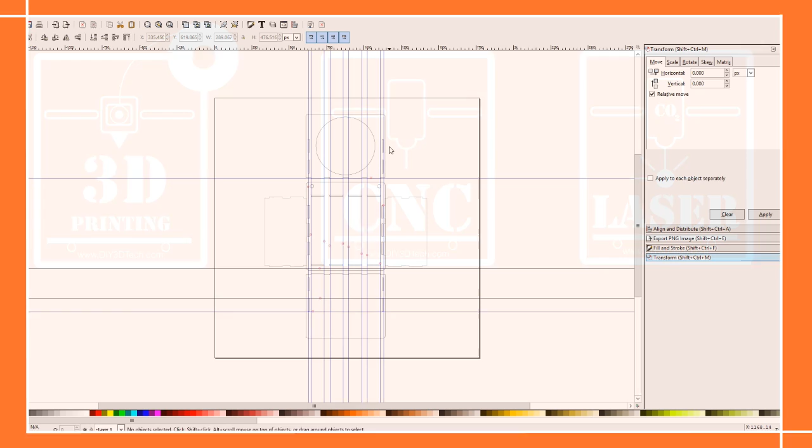In this episode, we're going to take a look at cutting this out on the laser. So what is this? This is a sanitary wipe holder that we're going to cut out of acrylic for the utility room. So the idea is we'll have a couple mounts here for the pegboard. So typical pegboard's about 1 inch on center, so we've spaced these out about 6 inches, and this is going to be a little bit proud of that.

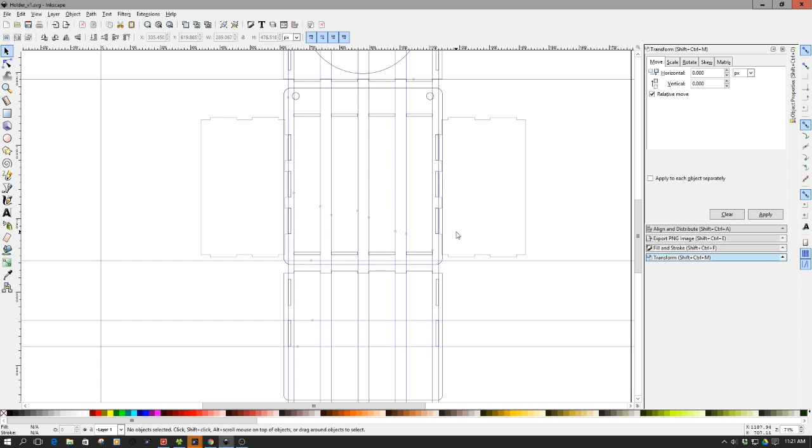And the idea is we'll have a top piece with a canister we'll slide into, and obviously a bottom piece to support it, and then flanking sides, a left and a right, to provide additional support to the bottom. The idea is we'll cut this out of about 2.4 millimeter acrylic, and then kind of glue it up with some acrylic adhesive. So just want to talk about a few basic design tips here.

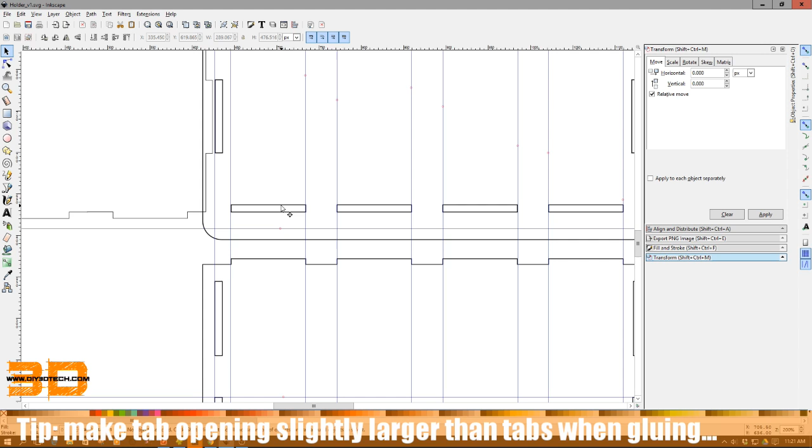So one of the big design tips is keep in mind that the laser is actually going to cut both sides of this line. So this is one of the reasons I've used a rather narrow line to minimize the kerf. Now this is both your enemy and your friend, because it is going to make the hole larger, and instead of scaling the hole, what I've done is ensure that the hole is actually just a slight bit larger than my tab that goes in it, because again, I'm going to glue this up, so I'd rather have a little bit of extra room rather than a little bit less room.

And that also goes for the sides here, because as you can see, my edges here to here are just a fraction of an inch proud, and when it cuts it out, the laser cuts the outside of the line, the kerf will create about a 0.2 millimeter kerf, so I'll gain about 0.2 on each side, to give me a little bit of wiggle room, and I kind of want that, because the intention of this design is not to be pressure fit so much as it is to fit together and be glued up with some acrylic adhesive. So that's a little bit of a tip in working with that.

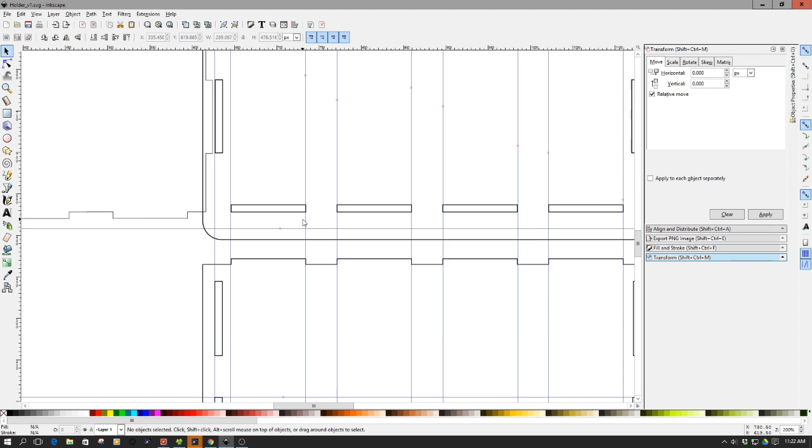Be cognizant of that. The other thing that I want to point out is when you're working with thin areas, for example, like we have up here and here, because if these get too close to the edge, when the laser is cutting the outer curve, it tends to melt this area just because it's obviously getting hot and it can't sink or dissipate that heat. So be careful how close to the edge you get.

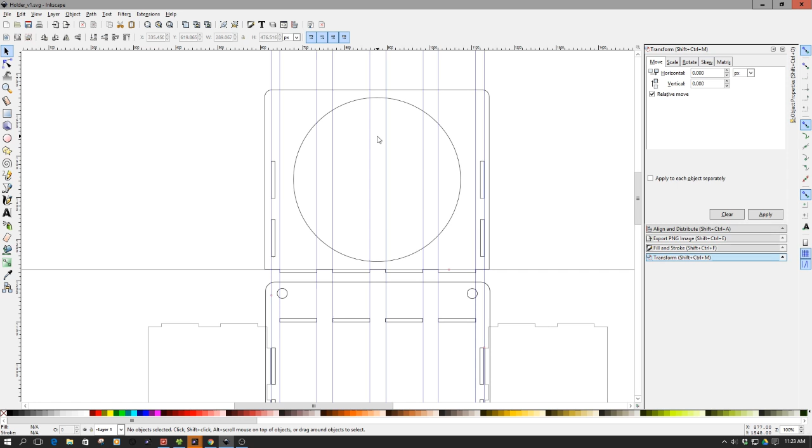Actually, I was a little bit closer. I wanted to be a little bit prouder in the size of the circle. And I got a little close to the edge in the first design, and I had to back this off a little bit to prevent it from burning through. So just kind of a little bit of another tip to help that along.

Now, the one thing I did do to speed this up is I utilized the same set of tabs both vertically and horizontally, and this allowed me to cheat a little bit, because when I added these, and even these two are simply two of these four, it connected over here by going up to path and doing a union, as you can see here, and that's what I did across the board. Now the one thing with this means it's not going to be perfectly symmetric. It is going to be asymmetric.

What does this mean? This means you'll have a left and a right, you'll have a top, and you'll have a bottom. Now, one of the things I do after I cut this out, I kind of dry fit it, and then I put a piece of masking tape on it indicating left, right, up, and down. So when I go to assemble these, it's a little bit faster, because when you're working with the adhesive, especially acrylic adhesive, it dries almost instantaneously.

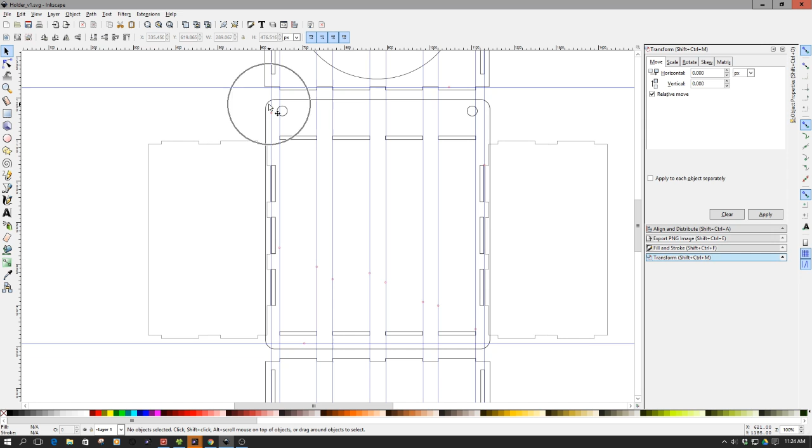So you want to make sure you got everything in the right spot before you go to do that, or you're going to waste about $10 in plastic. So kind of critical piece going through and doing that. I've used the box rounded corners function of Inkscape to provide some nice relief on the edges. I've squared them up here for rigidity, so just a couple points there. Outside of that, it's a pretty simple design.

Now, the other piece I did do is I did break these up into 5 different pieces. So top, back, bottom, and then 2 sides. It's 5 different SVGs after doing my design here, so I could cut them out, because I typically used about a 10 by 10 inch sheet of acrylic to cut these from, that I cut down from a larger 24 by 24 piece of acrylic to fit in the machine easier.

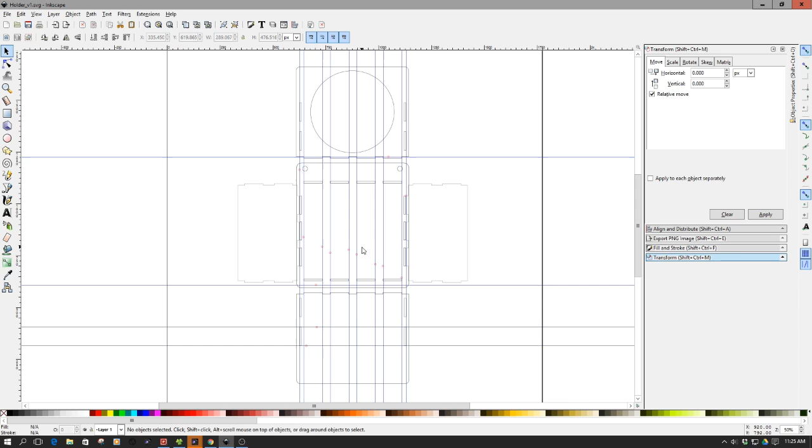So anyways, if you have like a standard 40-watt K40 machine, just kind of another tip to be able to break it up. So do your alignment in one big drawing, and then break them up, and then distribute them to smaller SVGs. And then I simply imported it into Corel Laser and then cut from there. So tell you what, let's hop over to the bench and let's take a look at the end product and see how it all works out.

Okay, welcome back. So in the computer we took a look in Inkscape at designing this, and now we've cut it out and I've got it laid out here. In the upper corner I'm going to place some time lapse of this being cut out. It's not that exciting, but it is kind of interesting, so we'll run it up there while I talk about it. Now, one of the pieces I do have to fess up, and again, a big part of these videos are the learning experience. And as part of this learning experience, I violated Norm Abram's #1 law. That is, measure twice, cut once.

So, actually when I designed this, if you remember in Inkscape, I used 2.4 millimeter acrylic. And that was my original intention, to use the 2.4 millimeter acrylic. And when I went to do it, I cut out the first piece and I realized I didn't have enough cut sheets for this, so I had a bunch of this white stuff that was already cut. So I decided, hey, what the heck, I'll just cut it out of that instead. Well, it turns out it's a little bit thicker than the 2.4. It's almost 3 millimeters, and so it's a little bit off, but it's close enough.

It'll work because I'm going to epoxy it up anyway, and I'll talk about that in a minute, but I just want to share that. Double check your material thickness. Even though it really looks the same and sort of feels the same, it's not the same. So point number one.

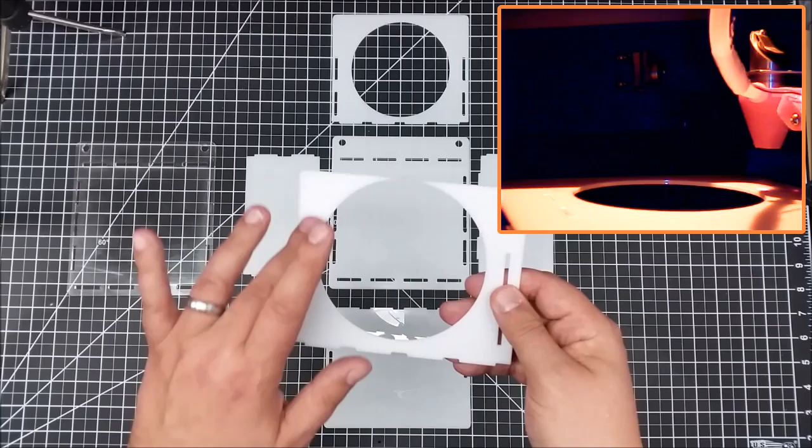The other point I wanted to share with you guys is this. So you notice this piece up here, and you notice this piece. So this was my original design, I had it a little bit larger for the cylinder to set into for the Lysol container, and you notice up here it was too thin, so when it came through and cut, it actually melted this between the inner cut and the outer cut.

So I had to go back and actually scale it down a little bit more because I wanted to leave some room in here. I really had to take that away unless I wanted to make this piece bigger, and then if I made this piece bigger, then I had to make this piece down here bigger, and it was easier just to make that a little bit smaller and tighter. So let's hope they don't increase the size of the Lysol container anytime soon. I doubt that, but this is also a good point to think about. I didn't think about it in the design.

When you're cutting something really thin, it's not like a CNC because it's obviously getting very hot. In a CNC, this probably would have been okay, but obviously in this case it wasn't. So a couple of learning experiences there.

Now the next thing is I'm going to assemble this. What I'm going to do is I'm actually going to epoxy it. I'm going to use some 5-minute epoxy, instant gratification. Why am I using epoxy instead of the acrylic stuff that fuses it together? Because this is a little bit brittle material, and if joining it with that stuff, I forget what the name of it is off the top of my head, it means that the joints will be somewhat brittle too.

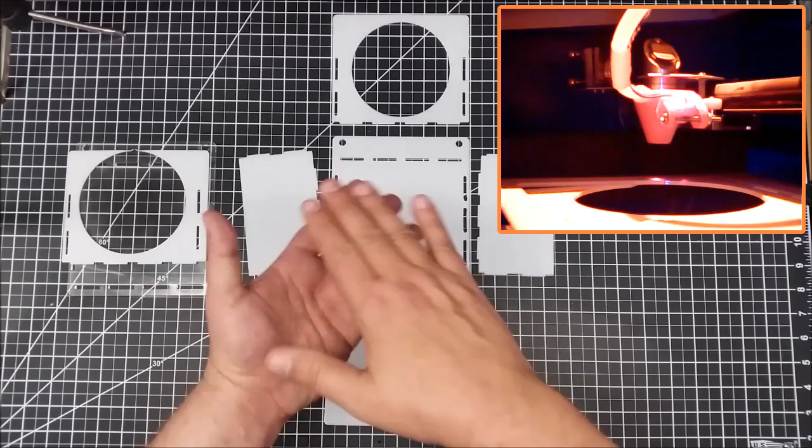Now what's going to happen is people are going to take wipes out of here, then press the lid back down on top of this. It's going to take a fair amount of force, and this junction, especially down here at the bottom, will be somewhat brittle, and this is what's going to take most of the impact, this piece sitting in here as well as these pieces holding some of the vertical tension.

By utilizing epoxy, at least in my opinion, it will give me some extra resiliency and also a little bit of filleting in the gaps down here and on the sides especially, to take some of that extra force and distribute it a little bit differently. So we'll see how it goes. This is sort of my opinion, sort of a build tip, and we'll see how it works out.

So I'm going to glue this all together, epoxy it together, and then we'll take a look at it, because I'm not going to bore you with me epoxying it. I think you guys can figure that piece out. And then by the magic of video, we'll be right back.

Okay, here we are. We have it all glued up and stuck on the pegboard with a wipes container in it. So it's come out okay. Again, I don't think this is the best piece I've done, and one of the biggest reasons is in the last segment, when I ended up cutting this out, I was originally going to cut it out of 2.5 millimeter plastic, and I ended up on 3, so I didn't get the best alignment, but I was able to kind of cheat with a little bit of glue and epoxy. So I made it work, and it's in the utility room, so I'm not going to sweat it too much, and I didn't want to waste $10 worth of acrylic.